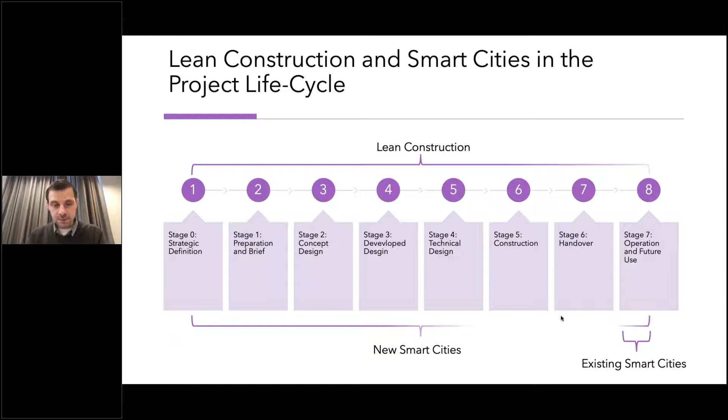And lean—if we look at lean in particular, it's really about generating value and removing waste: generating value to the client, to the municipality, to the environment, and removing waste. It does that through focusing on process and flow and continuous improvement, and as a core pillar of all of that is respect for people.

So what we're looking at is why lean construction even exists. When we look at other sectors and markets out there, we've seen a productivity increase, but in the construction industry we've seen a plateau and even a decrease over the decades. That's one of the things lean construction is trying to figure out why, and really to remedy with some really good new processes.

More so, what lean is trying to do is optimize and increase efficiency of projects, making them more timely and deliverable and made with a lower cost. Last but not least, it's the safety of the workers, and this goes back to this respect for people. Those are the things that lean is trying to optimize for.

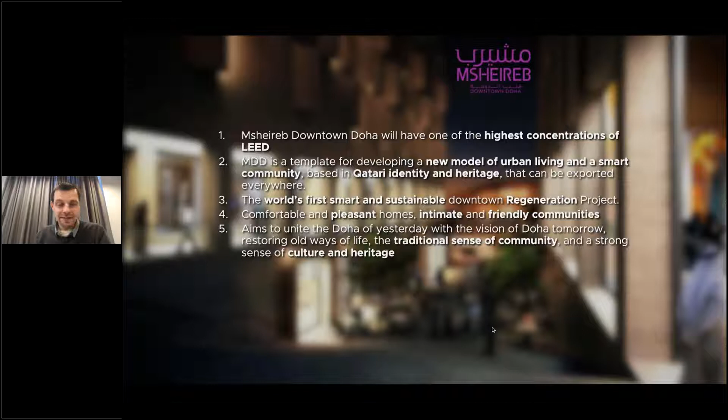We have the other one, Msheireb Downtown Doha. It has the highest concentration of LEED buildings probably in the world - I think they're all LEED platinum, and they house about 800 residents or so. One thing really interesting is that they're trying to use the area to boost Qatari identity and heritage, which is great. It has a number of other social values in addition to the smart technologies, like self-driving buses, solar panels, pneumatic waste, and feedback in smart homes. Two really, really cool projects.

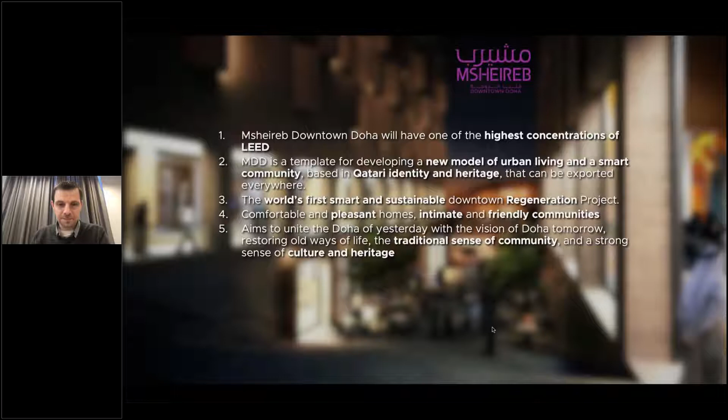This one in particular actually got a really prestigious award at Smart City Expo a couple of years ago, where they won as the smartest city in the world in terms of governance and finance. That's not a bad achievement at all, and I think that has made quite a name for the area around the world.

Growing out of this, we have TASMU Smart Qatar, essentially a smart nation program for all of Qatar. I believe it has been enabled by having these developments in Doha to begin with. What's really cool is that here - I believe led by the Ministry of Transportation - they're trying to use the power of ICT to deliver outcomes to citizens, residents, and visitors to Qatar, and drive the sustainable economic agenda set forth by the Qatari Vision 2030. That's the exact right way to think about a smart city, or about information and communication technologies for cities - to use it for a very good purpose, like the Qatari Vision.

So I think we arrived at a notion that these two concepts, lean construction and smart cities, are deeply connected, and I would say complementary. They're not necessarily exactly the same - you have some things you're doing in lean construction that you typically would only do in construction phases, and in terms of planning and integrated project delivery.

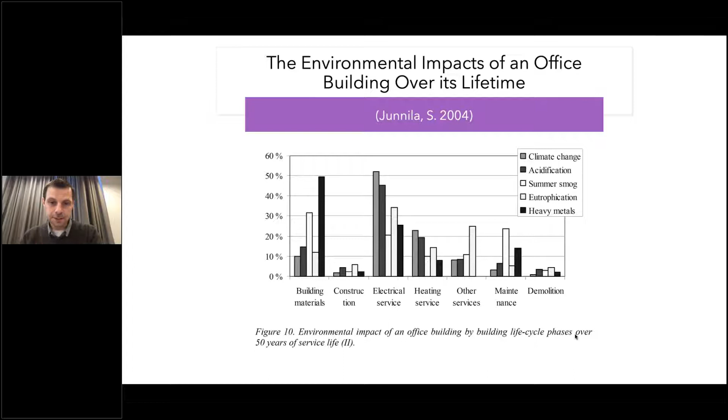So I think that would be the best argument I would put out why a city would engage in this combined toolbox. So I think that takes us through kind of the more theoretical part. Actually, there's going to be a little bit more theory coming as we move along, but let me just check the time there. Good.

Now we're going to look into leaner and smarter processes, where we're borrowing the lean concepts and we're looking at them from the prism of a few case studies in Sweden. By focusing on these processes and flows, we are generating value, removing waste, and continuously improving our cities. We'll break this into 4 sections: setting clearly defined goals and what's the value of that, following up on set goals, integrated design and project delivery, and an example of lean construction and smart cities combined. So that's the 4 ones we will go through, beginning now with setting clearly defined goals.

It sounds cliche to set goals, but let's just begin by looking at an example from lean. So here is a study where they looked at productivity as a goal in a specific project in lean construction, and that's something that was one of the things we're trying to optimize with lean, right?

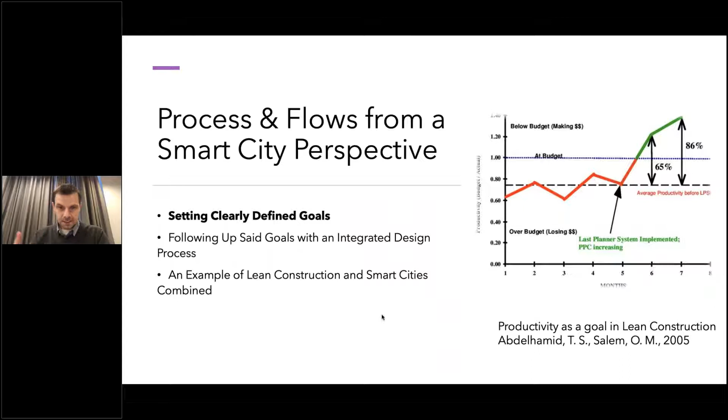How about cities? So let's look at 3 eco districts in Stockholm. We have Hammarby Sjöstad. Some of you may have heard about it. It started being built in 1996 when Stockholm was going to receive the Olympic Games. It didn't, but it got this amazing city district. 11,000 homes, and it's completed this year.

We have the Stockholm Royal Seaport, started 2010, 12,000 homes, completed 2030. And just as recently, we have a new area built by a private landowner. It's a church institution with 5,000 homes, completed 2035. So if we look at the goals of these 3 cities, it's quite interesting. There are some things to learn from this.

For this Hammarby Sjöstad case, they set out around 1996, well, how do we do something better in terms of the environment? Much better. And the politicians at this time just said, make it twice as good. And there was a bunch of goals in terms of energy and water and waste that had to be twice as good as whatever the standard was in 1996.

When we went to the Stockholm Royal Seaport, I'll mention a problem with that goal. When they set that goal, it was more a visionary, ambitious statement, and there was no idea about how do we follow up, how do we make our construction developers accountable to that goal. So what happened was, well, they did really well, and we had the Prime Minister of China come visit it and encourage all of his mayors to visit the area to say, how can we replicate this city in China? And they've actually replicated quite a few of them in China.

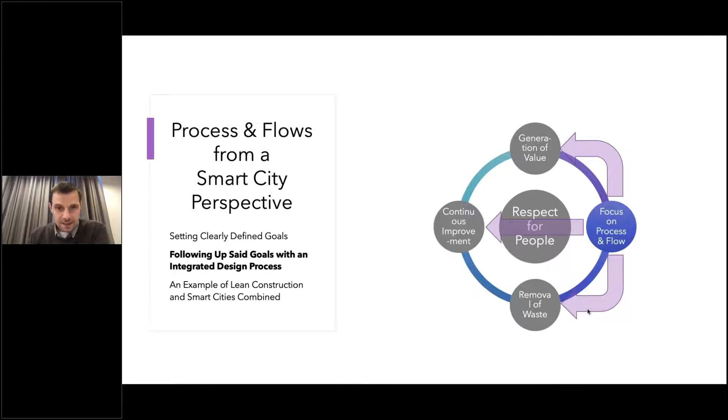So then, in terms of measurement and verification, let's look at that. This Stockholm Seaport case, as I mentioned, is about 12,000 new homes. It's built up on 9 phases that's going on for about 10 to 15 years. So as we were thinking about how do we create a good evaluation and monitoring plan for this area, and how do we refine the goals as we go along.

We realized that if we set all the goals and lock them down here in phase 1, we will have lost, and then basically use the same goals and verification methods for the rest of the phases. We haven't made use of the knowledge we learned in the first phase. And there's going to be new technologies coming in.

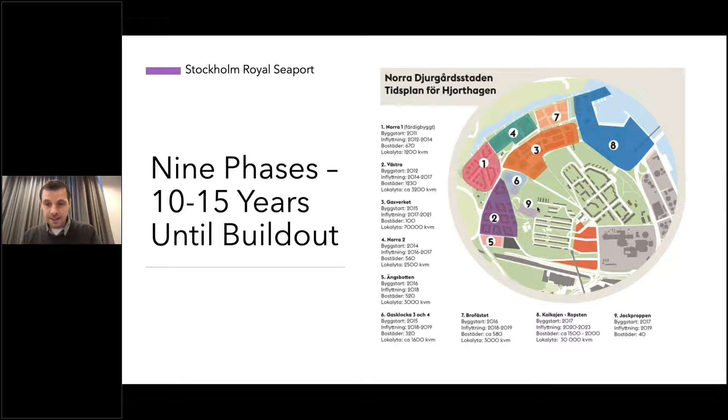So essentially what we came up with is something I think you would recognize in lean construction as well: we began with the requirements for the first phase, set down all the requirements, and then for all the building construction phases, we followed up how they did in terms of the performance of the construction and the materials, and then in the move-in, and in terms of operation when the resident had moved in, and that was phase 1.

What we learned in the early phases is that the very stringent requirements, like 40 kilowatt hours of energy per square meter, which is super low, that was actually met by the building developers, and it was even surpassed in some cases. So we could tweak that and bring that into the next phase with a slightly higher target, or they could create more renewable energy than anticipated.

And some goals, like recycling almost all the construction waste, were a bit too steep. So there the city put in a lot of effort to figure out why and how we could help them meet that goal.

So this is essentially an iterative learning process, and for each phase we have data points that ought to be collected by the building developers.

One problem: now we have 30 building developers that have all of these data requirements. They have to send us data so we can monitor whether they made it or not. What's the problem with that? It becomes really messy for us to get an overview and to access all of these systems. And there are legal barriers all of a sudden. The building developer says, yeah, I monitor these things, but I can't give them away because of legal issues or data security issues. It becomes a real headache.

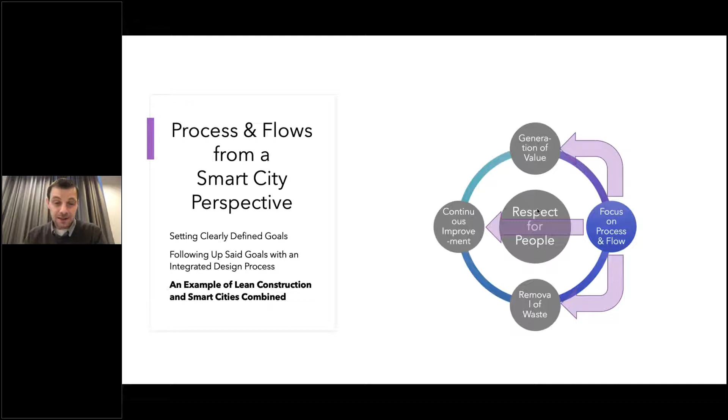But I think it's a nice story in this use case that merges the concepts of lean construction and smart cities in a pretty nice way. We'll begin on the lean side. This is a building logistics center built in the city of Stockholm at the Stockholm Royal Seaport.

Here it's a massive organizational collaboration where all 30 building developers join this logistics center, and they essentially share trucks that are typically late, not always on time because of issues on the other side. People have to wait until their material comes, and some of the workers just go off and buy the things they need to avoid further delays. Here, all of that is taken care of by having one really smart logistics center that plans very far ahead and uses this area as short-term storage for all the materials, so they can be delivered to the site as needed.

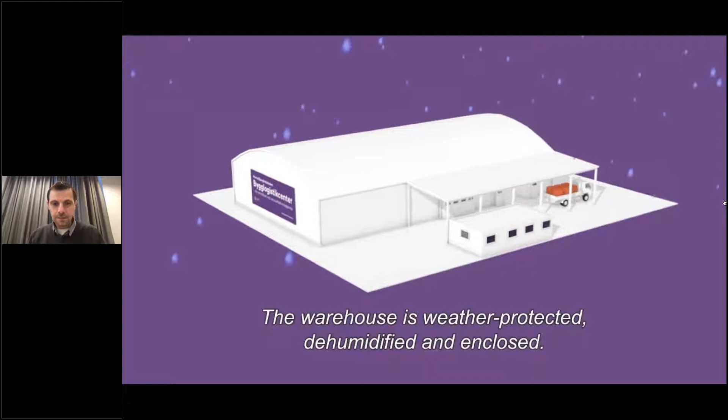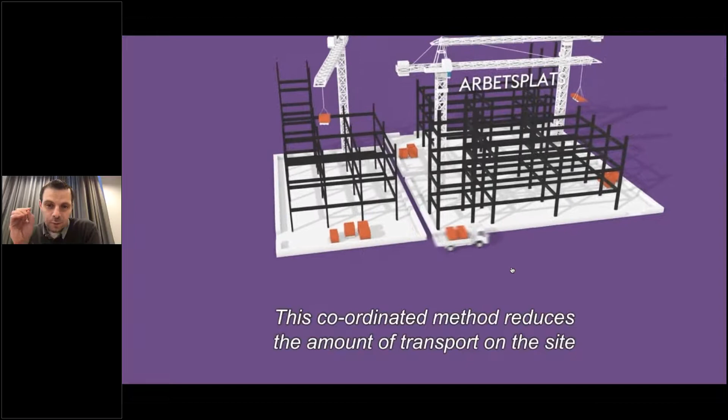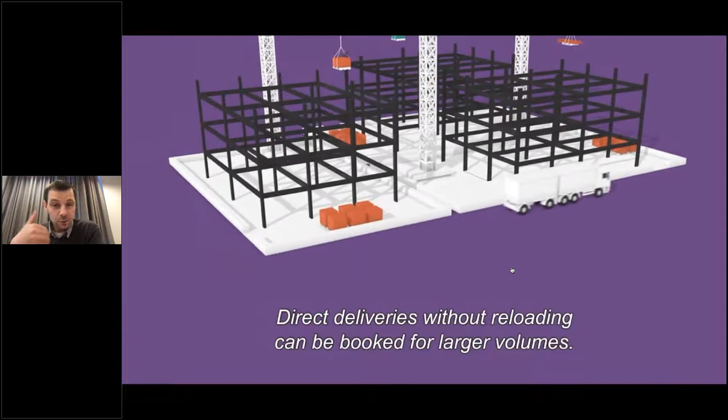What happens then is that you have these very fuel efficient and sometimes electric vehicles that only deliver what's needed for today to the site, and only those materials are there, thereby really minimizing the transport, which is one of the 7 lean construction principles - types of waste to minimize.

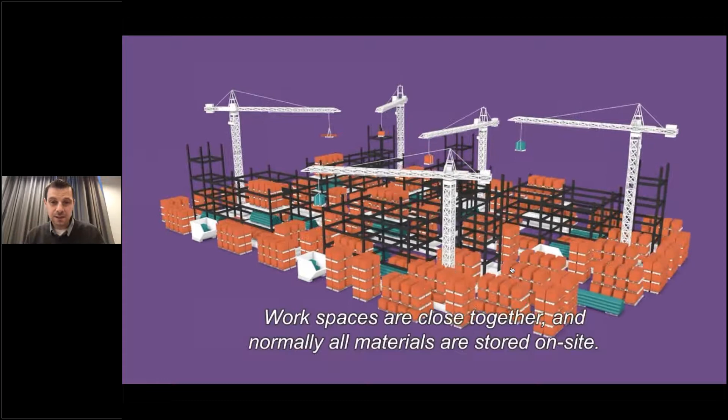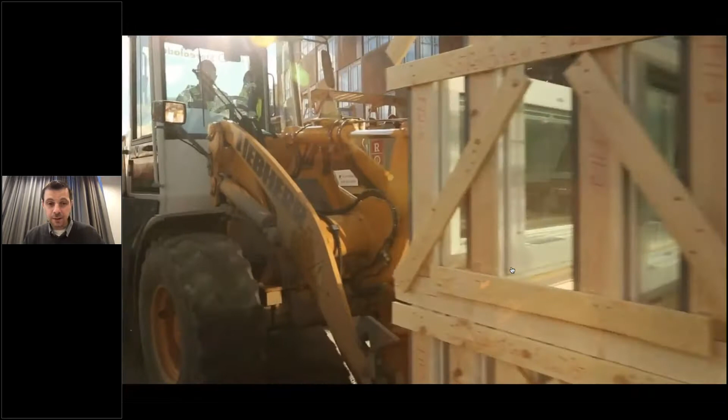You're also minimizing a lot of injuries because you don't have a ton of things just lying around at the construction site from different construction developers. You'll also notice that a lot of the resources in terms of machinery is shared by all the construction developers, so they don't have to bring any of that in. They're all sharing cranes and moving trucks, so those resources are used very efficiently and according to a time plan.

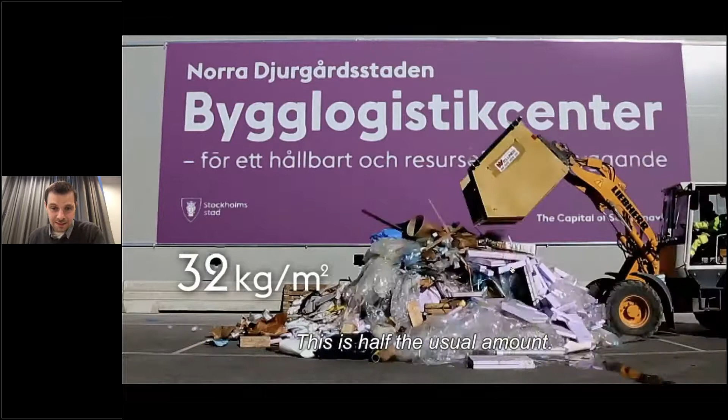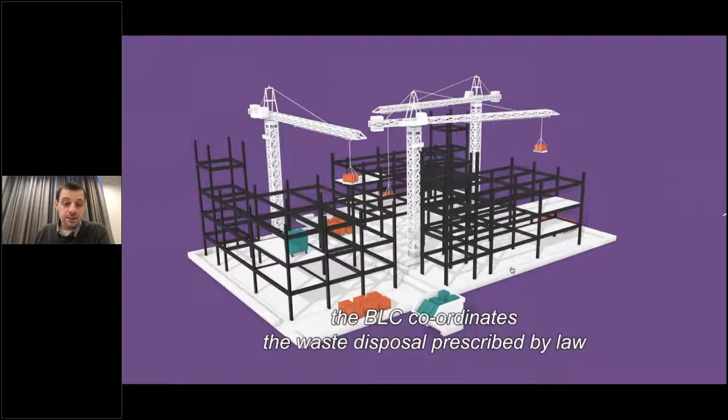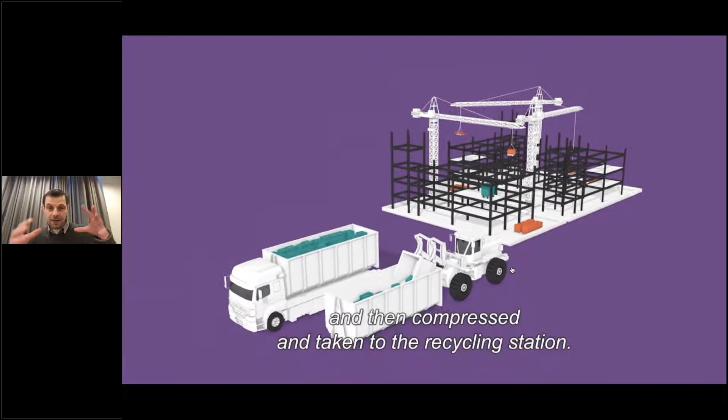To encourage higher recycling rates, they are putting recycling skips at every workstation, and they can even collect them at the floor level. All of this is coordinated by this building logistics center. As a developer, I just sign on, have my workers there, and this concept takes care of all the rest. So that was quite a bit of lean principles and lean thinking packed into one project.

This is an ongoing project here in the Seaport. If you come by, or want more information, I'll be happy to connect you with the guys working with this.

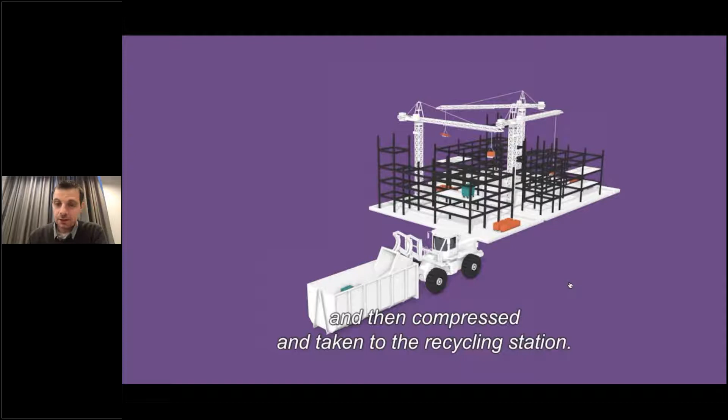You can also think about what's going to happen with this logistics center when the build out is complete in 2030, in 10 years. Let me just move forward. There we go.

This is really where it is a great example from lean to smart. So you just convert it into a city logistics hub. Instead of having building materials going in, you have goods, packaging, postal services, and everything we're buying online going through the same building, in quite a central place, using similar contracts. The challenging part has been the business model and the contractual arrangements between all of these stakeholders to get everything to work.

But they made it work for the construction phase, so why not for the operation phase? It is a bit more challenging on the operation phase, but again, here is a really good example of how we eliminate one of the 7 types of waste, e.g. transport, that is one of the lean thinking principles or types of waste.

The next part we're getting into, and I'm just going to double check how we're doing on time. All right.

It's about leaner and smarter data-driven decisions. While data is a very big part of smart cities, it is indeed also a very big part of lean. The better informed decisions that are driven by data we can make, typically the better the results and the more efficient we get.

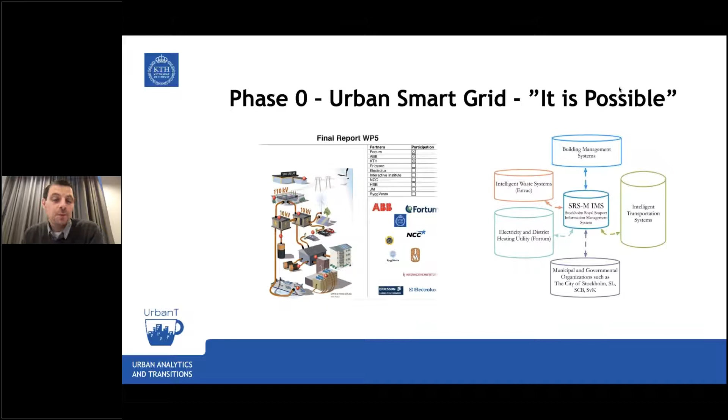We began this journey around 2010, where they were going to build a smart grid, and we were tasked to see if we could help with all of this evaluation, and evaluate and monitor all the other sectors as well while we were building the smart grid. At that point we realized, yes, it's possible. We came up with the concepts and identified that it's possible.

In the next phase, we brought in all the stakeholders that had a chunk of that data, and also decided on what type of feedback we wanted to deliver on a city level, building level, household level, and an individual level. And that was about it.

And then we really realized another thing: most of the data we needed was here around us. We didn't have to add a lot of new sensors. That was also quite an interesting acknowledgement.

Then we actually went to play around with this a little bit. So we set up an environment to be able to collect all of this data and transform it into key performance indicators like greenhouse gas emissions per capita. And we used urban metabolism principles to set all the system boundaries of this district.

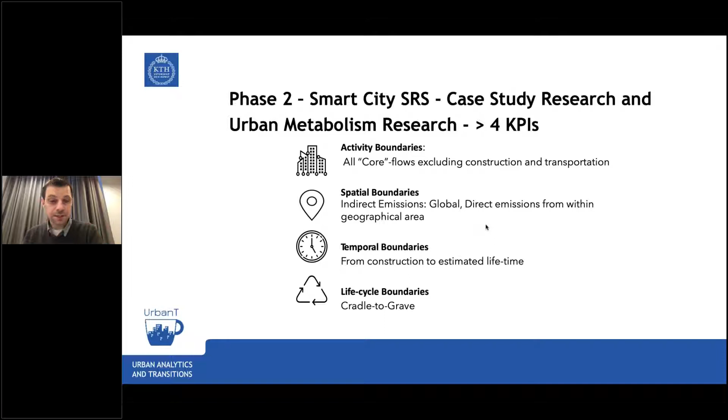We looked into all the data sources we wanted, their spatial resolutions, their temporal resolutions, and their different data suppliers. And one by one, my job for a couple of years was just to knock on doors and more or less beg for data, making them share it in the way we wanted.

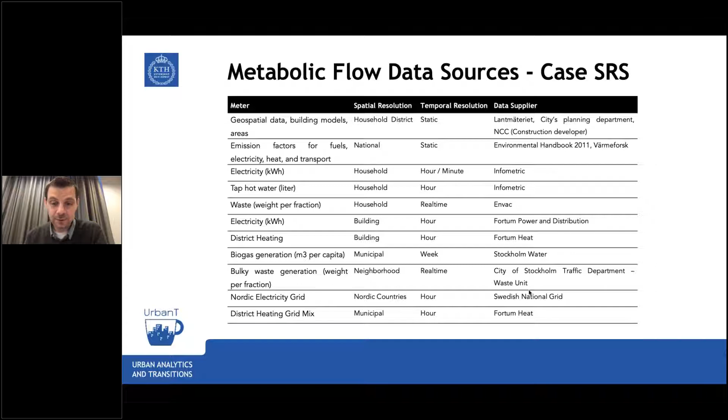Based on that, we developed a framework, smart urban metabolism, where essentially we again noticed most of the data is already there in the city. We just need a good way to integrate that.

So we created an integration platform that spoke very many languages and could connect to many different types of systems. What we really knew and had competence in was translating all of those urban flows into emissions and environmental impacts. So that's what we added here.

And we had a data model that represented the city from a city perspective all the way down to a room in a household. Then we had a calculation engine that through some APIs could create real-time feedback. That was initially what we thought was going to be the most interesting part of this, so we provided real-time feedback to our stakeholders on a city level, building level, and to the citizens.

And then as a side bonus, we ended up with a lot of data, big data. We started exploring that more in depth, and through that we learned some really interesting stories that could lead to much better decisions also. I'll get into some examples of that.

So in terms of the real-time data, this is looking at a household. You have the energy sources, the intermediary sources, and transformative sources, and then you have the end users in my household here at a given time. This is really where smart urban metabolism becomes smart, because typically you could only do this at a city level, maybe on a 10-year perspective, or in the best case a 1-year perspective. This is updated essentially in real time.

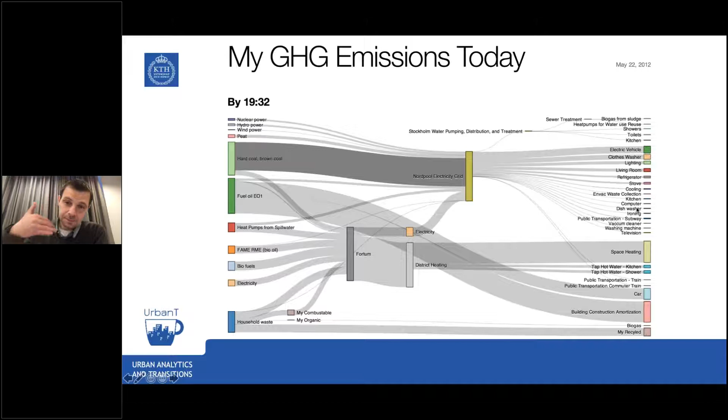Here you can follow household waste that is measured for my household with a special sensor. Some of that is combustible, that goes to my district heating utility that co-powers electricity and district heat, which heats up my apartment and my tap water. The electricity goes to the Nordic grid, which is then used to pump and treat my water for my showers, and the other end use, the other electricity, goes to my home. Now, the other layers on this would be doing the same for my building and for the entire district.

Who cares about this? Not a lot of people, but a very small group of urban metabolism researchers use this to figure out, the width of each box you see here is the amount of greenhouse gases going through that flow. So if you're dealing with a greenhouse gas study, this is basically the type of tool you would use to figure out where the big flows are and where we should put in the needle to make an intervention.

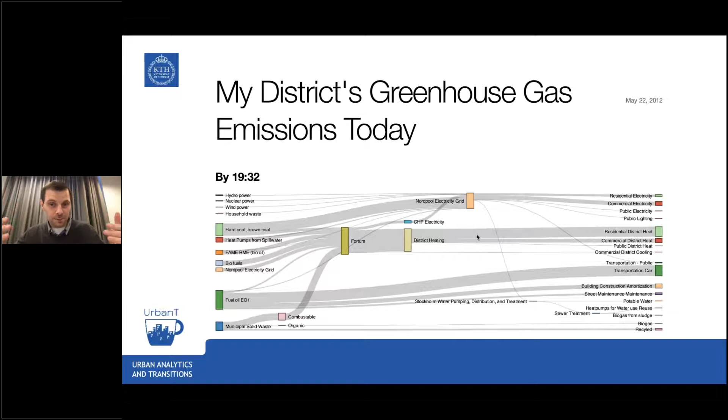Then we can take that same data and provide feedback. Back in 2012, we were playing around with augmented reality.

So I guess here you could ask it, what's the greenest building near me? And it would point you to it and tell you who is the developer of that. Here, if you go close to that building, you could look at its performance by just holding your phone against it, and then you would see the heating, the electricity, the water, renewable energy, waste, and greenhouse gas emissions compared to the neighborhood average. This was maybe interesting if you have a visitor from another country or so.

What's interesting about this is we asked the residents, and we knew what they were going to say. We'd been working on all of these key performance indicators for a few years now, and we wanted to put them up on a dashboard on your wall. The residents really didn't want that. They were like, what are we going to do with that, if you're just going to show us like 4 numbers on the wall all the time? We knew they were going to say that because we had done some studies before.

We asked them a follow-up question: well, how would you like to have it? And they said something really important that rhymes with lean principles. They said, create some value for us. I have a son that is always late to the bus, let me know when he's going. I walk to work, so let me know if I need to bring an umbrella. And my wife, she takes this route, so if you can put all the road monitors in, so she knows if she should stay home or take the bus instead of driving that day. So we threw in like 30 different types of sources for them on weather and energy and traffic and water and social and other aspects, so that they maybe every now and then would look at these boring indicators.

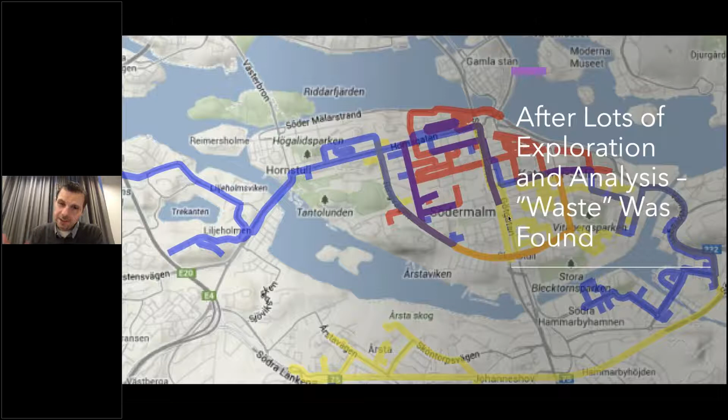So we tweaked and tweaked, and finally had an idea: let's track all the trucks collecting this waste instead. Then we saw something interesting. In a very crowded part of Stockholm, during a 2-hour period, you had 5 heavy-duty waste collection trucks collecting waste on the same streets. We thought that was ridiculous, but maybe it was just a one-off in this area, so we looked at the entire city of Stockholm.

Here the red parts are some of the most congested parts of Stockholm, and here you have 15 companies registered with trucks picking up waste at the same address. So that became a problem.

We asked why this was going on and took it to the municipality. They realized they'd passed a law creating a free market, so wherever you could find a customer, that's where you got it — even though it was publicly procured, and they had the power to do it smarter.

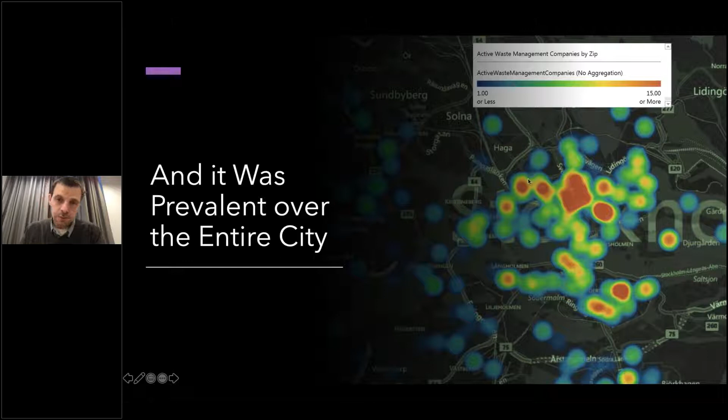So we went back and made an analysis of the city. We zoned it into a number of different parts and asked: if everybody keeps the same number of customers, what happens? The result was 53% less miles traveled, 46% less time in traffic — a big win.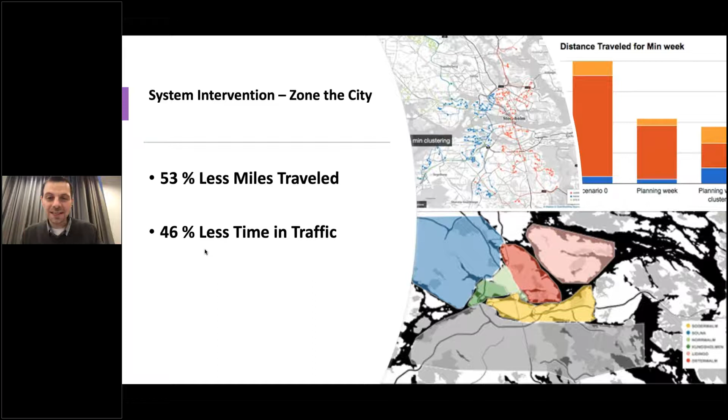This was unknown to us until we started looking at the data. The city wasn't even aware of this; nobody had reflected on it. It was out there in the open, but we had to explore the data enough with the right set of questions. Luckily, just recently they adopted this and it's been passed by the municipality.

They added a few more regions, and we hope to be able to evaluate what the real effects of that were.

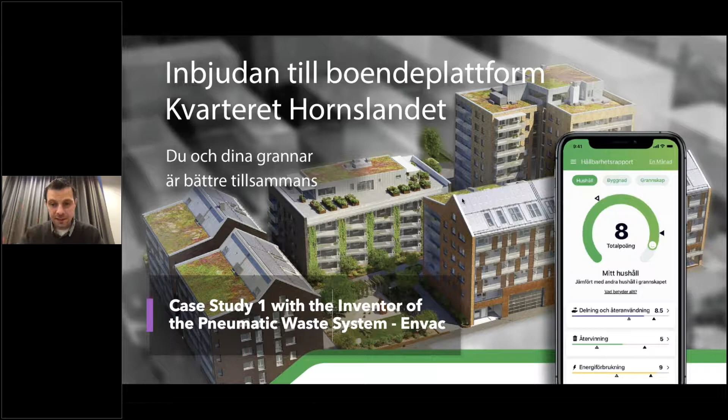So case study one: we use the inventor of the pneumatic waste system, Envac, a system that takes away waste and through which we get household-level feedback on recycling rates. We're essentially adding a digital infrastructure to their physical infrastructure, based on apartment, building, and neighborhood level, with quite a bit of theory and science underneath it. They're able to do their social things, but in particular we're providing feedback and monthly reports to nudge them into better decisions as they go along.

This is a schematic of how we fuse this digital and physical layer. By increasing the sharing of things in the community, we take in less goods. By increasing reuse, essentially not throwing away something that works well, like a stroller, and giving it to somebody else, we're increasing the lifetime of materials already made. And by educating and providing feedback on recycling rates, we maximize recycling rates. At each step here, we're reducing carbon emissions.

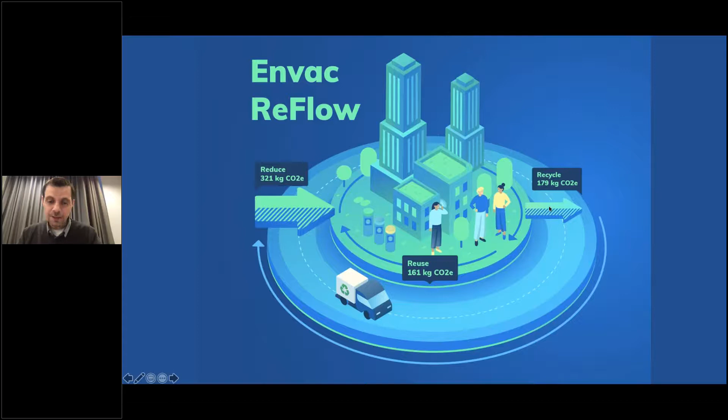I'll skip this because we don't have time. There was a second case study with the same network, where instead we coupled it with a smart grid project in the EU.

Called Intergrid, with 150 residents, we helped them by using only social tools through the social network to reduce peak loads. From the participating households, we had a 56% peak load reduction, which is very, very high—and these are preliminary numbers, I should mention. If we divide that across all the households, we come down to 14%.

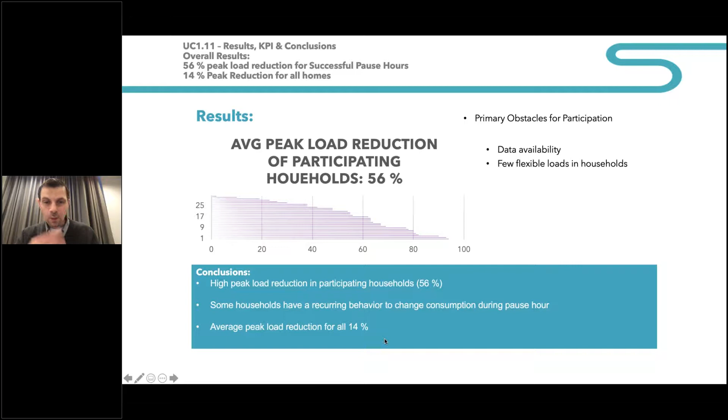Why this is interesting is we compared this with 150 very, very intelligent and smart homes that had smart appliances, smart plugs, smart dimmers, thermostats. In that project, they were able to reduce their peaks by 5%, and that cost about 2,800 euros per household, while this is barely—and this is already an overrated number—75 euros max per household. So it's an interesting addition to these smart tools, finding ways to engage directly with citizens on their terms.

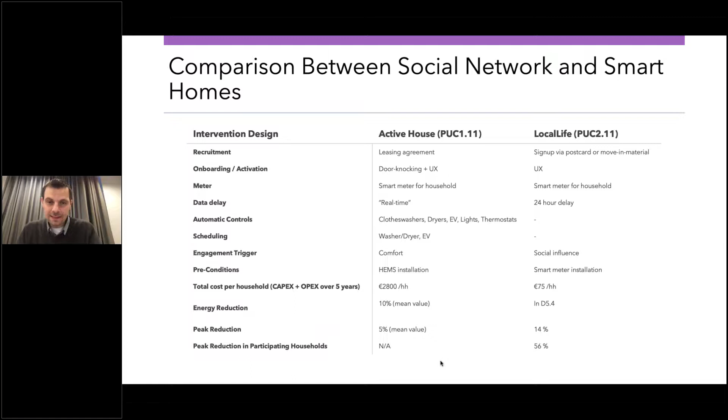A lot of people we interviewed in this project with the smart homes didn't really understand their system that well. But that's essentially the last point.

In summary, there's an urgent demand for us professionals in lean and smart to advance our skill sets to meet global and local demands. The concepts of lean construction and smart cities are deeply connected—any city serious about the environment needs leaner construction for smart cities. Setting clear goals and following up on them with extended teams is a critical success factor in lean and smart projects.

The last two bullets: the ability to find, connect, and analyze data from related stakeholders holds immense potential. We need to develop these abilities within our organizations, and I think we will—we will see data scientists in most of our organizations as we progress.

Our projects are neither lean nor smart if we do not find a way to engage the often overlooked stakeholder: the workers and the citizens. We do that by creating value for them. I actually had an example for the workers as well, from a Swedish project, but we'll get to that in the questions later if we have time. The principles are the same: create value for them, which is a lean principle.